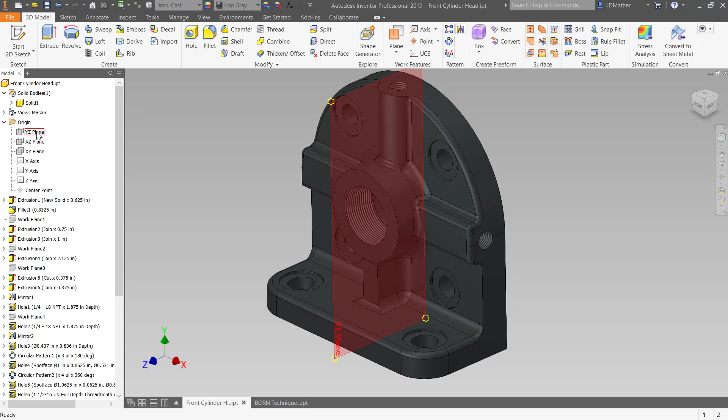In this video, I want to take a look at what's generally referred to as the Born technique, B-O-R-N, which stands for Base Orphan Reference Node. The foundation of the Born technique is to use only the origin planes and the origin center point for your sketches if possible. Sometimes it isn't practical, but as much as you can, use only the origin planes for your sketches. That way, if something changes, your model will be more robust and less likely to fail.

Before I start analyzing this existing part, let's change the color of it to make it a little bit easier to see on the screen. I think turquoise is an easy one to see.

So when I look at this thing, a few things pop out at me right away. I would expect to see a fillet coming across here, and certainly a fillet on this edge to get rid of that sharp corner. In the same way on the other side, I would expect to see a fillet so it looks more like this on the top side. And then I would expect to see a fillet coming along this edge and that edge as well. Those are just things that pop right out to me.

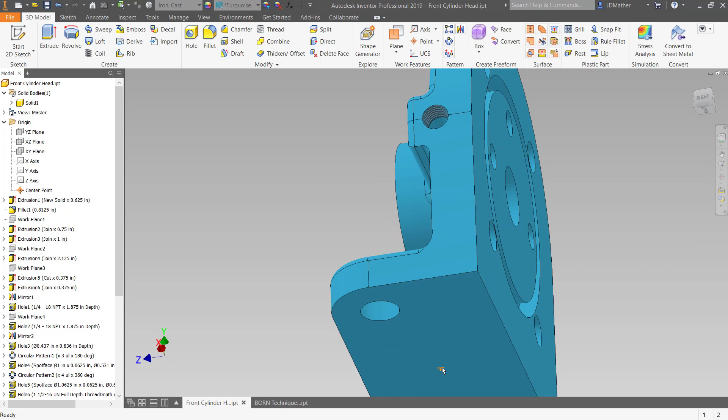When I start analyzing a file, the first thing I like to do is turn on the visibility of the origin center point and see if it was located in a logical location. Now I can't tell—it looks like maybe that was put in the midpoint location of this surface, but I'm not sure if it was or wasn't.

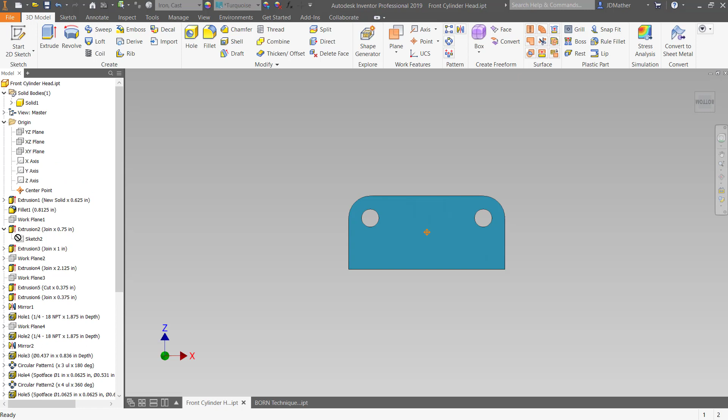That may or may not be. Actually, I'm kind of curious now, so what I'm going to do is drag the end of part marker up. I want to get to before there were any holes in here, and I'm going to tell it to put a point at the center of that loop. So I'll put another point on here and select that. And I see actually it isn't even in the center of this base.

So I would say the location of an origin or datum is really the most important, or first thing, you should consider when modeling a part.

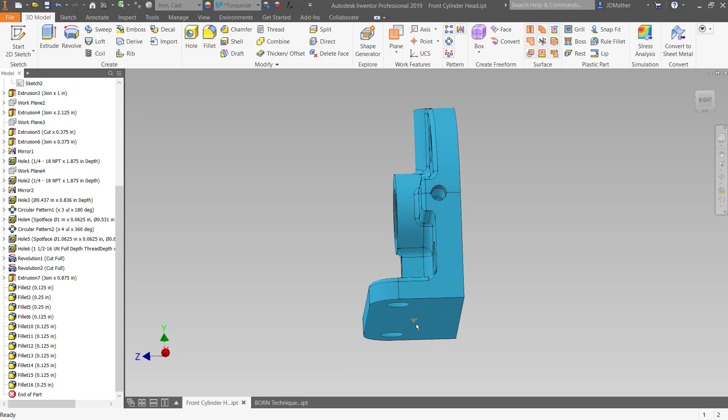Now, I spent 8 years out on the shop floor working on machines, and if you've ever run a Bridgeport milling machine or some milling machine, the first thing you do is you set up a datum. Your table would be one datum, or some parallels or a vice would be the datum you might put on the bottom of this thing. You would have the side of the vice that doesn't move, the set jaw, as another datum, and maybe a stop or something as a third datum. But you set up datums.

Now we can cheat a little bit on that in Inventor, where we put our datum, but we should do some consideration of where we put our datum, and I'm going to come back to that in a minute.

And so I started to examine the features, and I see a work plane here, and I seldom ever create any work planes. I may once in a while create a work plane, but very few work planes.

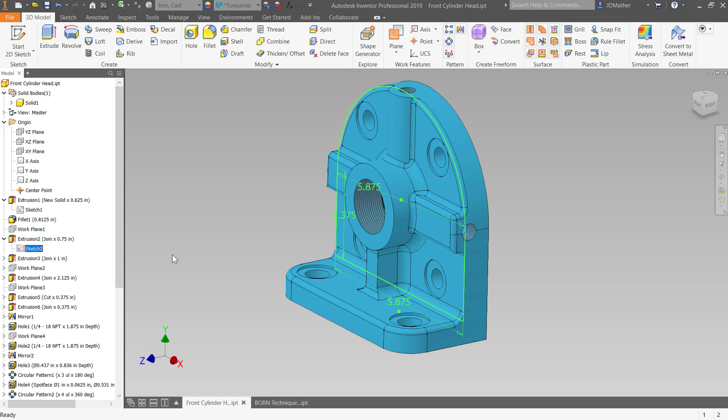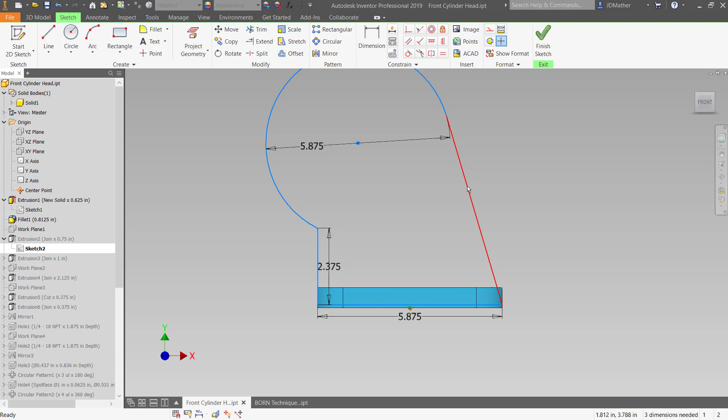Probably not. Anyways, I'm going to edit this sketch because I see there's no push pin or thumbtack on that sketch. I edit it and see down here it says 3 dimensions needed, and by the color of it and the fact there's no push pin, I can tell this is not fully defined. In fact, if I start grabbing geometry, I see it's missing a tangent there, it's missing a vertical constraint here, and it's not connected down here.

So think of this as back when I started out on the Bridgeport milling machine. The first thing I do is set up 3 datums, and part of the reason is that I can remove the part from the machine, take some measurements, and if I need to make additional cuts, I can put it back into the machine exactly where it was before, and make those cuts with confidence that I'm not going to scrap the part.

This runs along the same lines. If you don't fully define your sketch, somebody could easily come along and drag that, or you could accidentally drag it yourself and cause all kinds of problems with your geometry. So that's just one sketch that isn't fully constrained.

If I'm guessing, if I see one, I see more work planes. So already we have 3 work planes here, and here's another sketch that's not fully defined. If I go down, here's another sketch not fully defined, another work plane. Going down here, another sketch that's not fully defined. Almost every sketch is left underdefined, and that's just really poor modeling practice.

So let's look at how I might model this part. The first thing I have to decide is, and this goes back to when I started out on the drawing board back in the last century, when we go to lay out the views on a sheet of paper, you had to give a little bit of thought to what you were going to do before you even started.

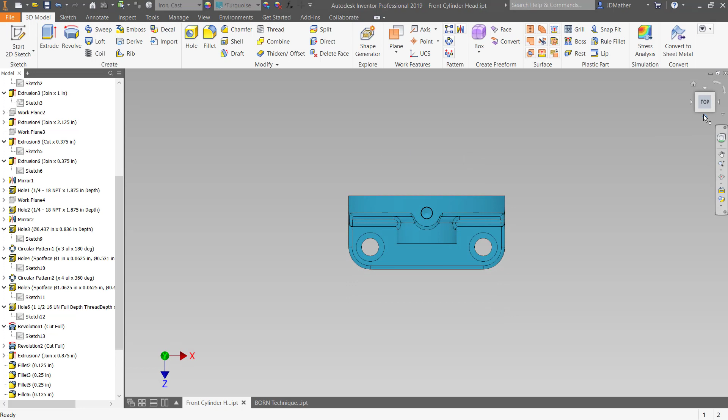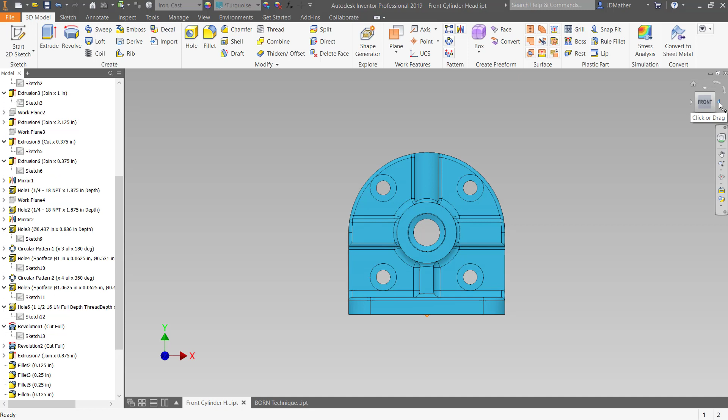The front view is a pretty good view, or this view would be a pretty good view for showing the most detail. And even as I look at this, I start to think about a different way that I might have modeled this than what I'm going to show you. So I've already come up with one way which I'm going to show you, and I'm even thinking maybe I should have changed that and done it from this view. So there isn't just one right way, there's multiple right ways, but I try to find a view that really shows a lot of the details, and I'm going to do it from this view.

Let me restore down this, and I have a new file that I've started, and let's put these side by side here so that we can look at this and see how we're going to do this.

The next thing to do is to look at the geometry and try to break it down into basic bits. One of my basic bits I see is a cylinder here, I see a cylinder here, I see part of a cylinder here. I see a box here, a box here, a box there, the height of the overall box, and then a bunch of cylinders. So I see several boxes and cylinders. Think about that. I can break this down into only several boxes and cylinders.

And if you've ever run a lathe, you know that you can break down a cylinder into a rectangle. In fact, all of these boxes can be broken down to a rectangle. So really everything here could be done with only rectangles. Now I'm probably going to use some other tools other than rectangles, but all of the geometry on this particular part, except for these fillets, could be done with simple 2D rectangles. So I'm thinking about back on the drawing board days, back in the last century.

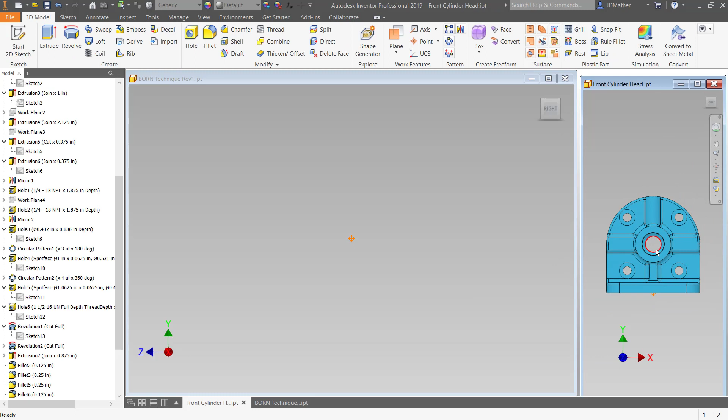Now sometimes I'll cheat in Inventor just because there are efficiencies to be gained from putting the origin in another location. I might put the origin up here in the center of this circle right here, but in this case I'm going to put it in this corner right here.

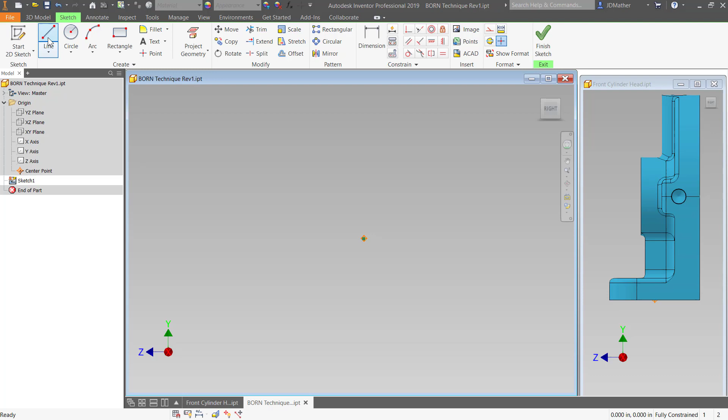Now I recommend when you are modeling in whatever CAD program, that you create one line, or one rectangle, or one circle, one piece of geometry, and dimension it immediately. So I'm going to create a line, and I'm going to go from the origin, over here, and I'm going to dimension this line immediately to give me a sense of scale for the rest of my sketch. That distance is going to be 2 and 11/16.

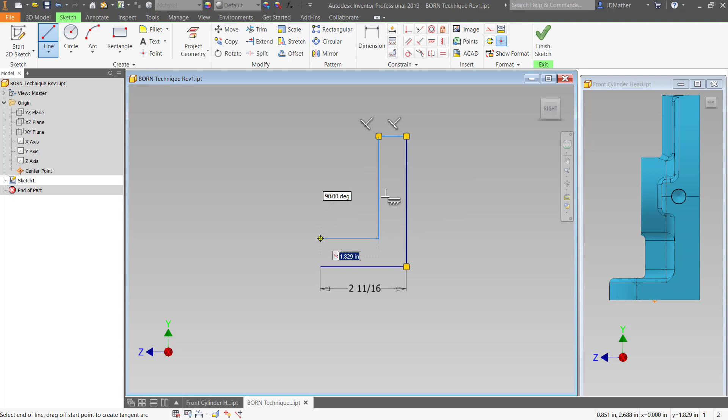I'll put in 2 11/16. Now I'm going to draw the line coming up, over, down, and so forth. I'll go up from this point and come over about like that, then come down about like that, and come over about like that.

Or I could have drawn 2 rectangles. I'm using Inventor 2019 to demonstrate this, but in Inventor 2020 the way it selects profiles has been dramatically improved, the enclosed area here. I might just do it as 2 rectangles in 2020.

But I'll go ahead and put some more dimensions on here. Don't go too far along before you put your dimensions on, you don't want it to get too complicated. So I'm going to dimension from here to here, that's 0.75, and I'm going to dimension this as 0.625.

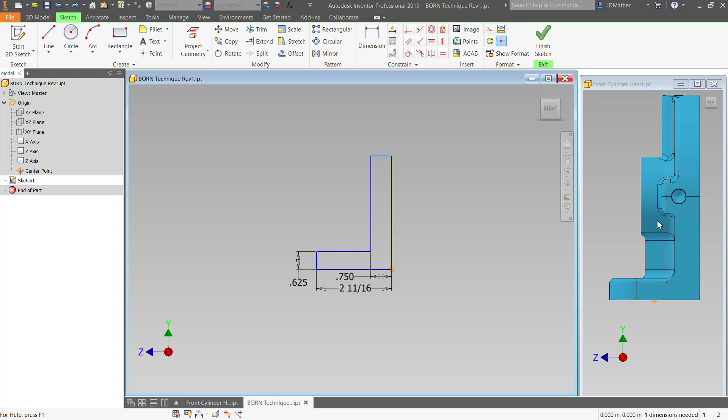I'm going to dimension the distance from here up to here, and actually I don't really know what that distance is, so I'm going to undo that. Remember I said I was thinking about putting a datum, or putting the origin right in the center of this. That's because when we design a part or machine, we dimension to critical locations.

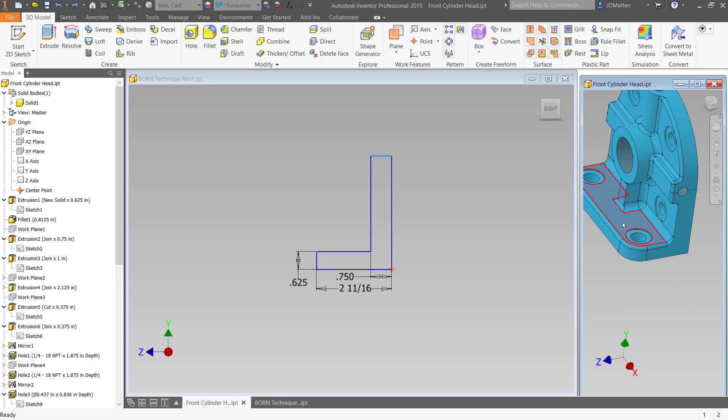The critical location is from the bottom of this part up to the center of this hole. This would probably be a cast surface, rough surface, and this would be a machine surface, cast surface. So put the dimensions to the machine surfaces.

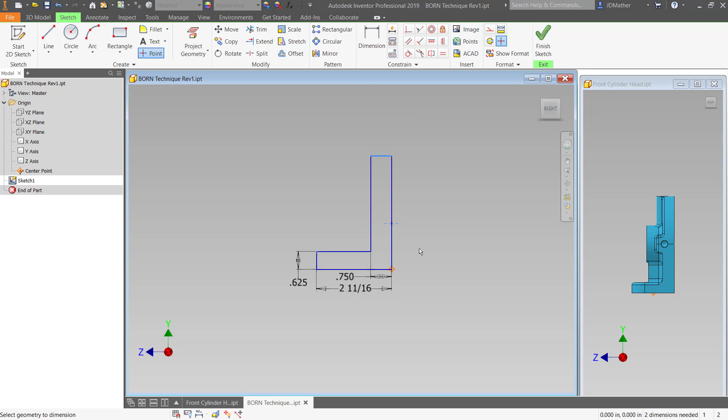I'm going to put a point up here about where that circle is going to be, that cylindrical piece. Be careful you don't click on the midpoint unless that's where it's at. I don't know that it's at that midpoint, so I'm going to click about right here, and dimension from this up to that point, 3 inches, so the center of the cylinder will be at 3 inches.

And then I'm going to dimension from this point up to the top of the part, and that will be 2 15/16.

Alright, so now I have the basic shape of the part. I have it begun, and it might be advisable to just keep the sketches simple and finish this sketch and go on to the next. But I'm going to add a little bit more geometry to this one, so I'm going to do a rectangle.

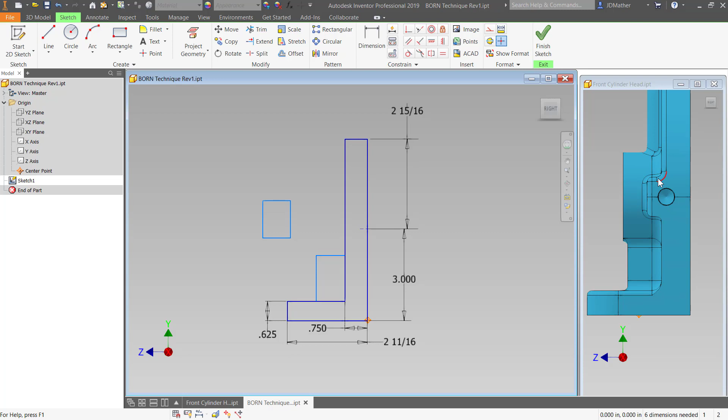We'll see why here in a few minutes. I'm going to do a rectangle about like this, and then put another rectangle out here in space. Here's what I'm looking at: this rib right here. So I have a rib right there and a rib right here, and those are rectangular in shape.

I'm going to draw a line from this point straight over perpendicular, then right click and change this to a construction line. Because that's the center of this cylinder, in order to remind me as I go, I'm going to change that to a construction center line, so that will be the center of this cylinder.

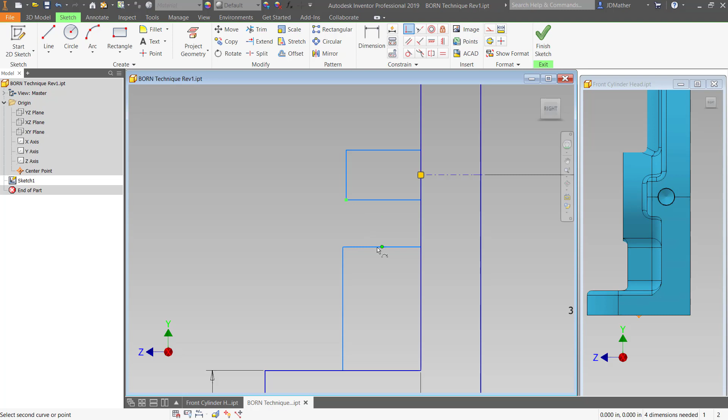Then I'm going to do a coincident constraint between the midpoint of this rectangle and that point, and another coincident constraint between this point and this line — not the midpoint, not the end of it, just somewhere on that line. Then I'll put a couple more dimensions on here.

So I'm going to dimension - remember, this is a datum and this is a datum. I'll dimension from this datum over to this edge, and that's 1.125. And then the distance from here to this datum back here, and that is 1.625.

And then I want to dimension, I have this rib that goes from here to here. I want to dimension the height of that rib as 1 inch. I'll finish the sketch, and I'm going to save this.

Save often. There's no excuse for losing your work. Every time you do something right, save it.

And in order to clear up clutter on the screen, I'm going to turn off the dimension visibility of that first sketch. So this L shape is this shape. This rectangular shape is this rib right here.

And then I'm going to continue on along those lines. So I'm going to start, and this is kind of like being on the drawing board back in the last century, where we laid things out with a pencil on a sheet of paper in 2D. So that's kind of what I'm doing now.

So I'm going to start a new sketch. I'm going to project geometry. This point right here, remember this is that center line, the center of this hole. I'm going to project that point into my new sketch. And then I'm going to draw a rectangle from this point, and I'm going to bring that rectangle up.

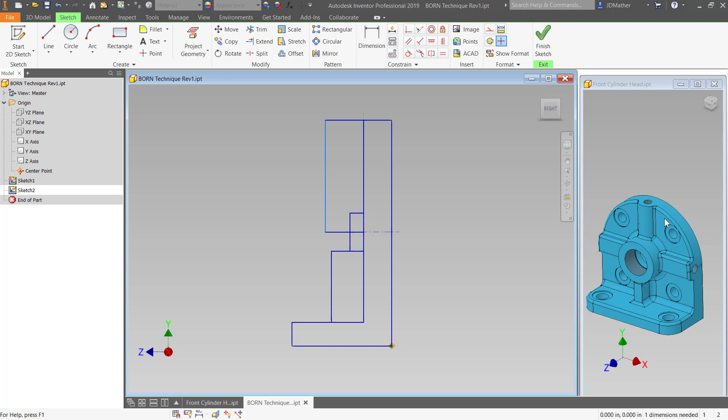Actually, let's bring it up about like this. And I was trying to decide where I want to let go of that. And now I actually want this point to be connected up here at the top, so I need to project that point as well. So I'm going to project this point, and then I'll drag this up and snap to that point. So what I'm doing is I'm doing this cylinder right here.

If we revolve a rectangle, we get a cylinder. So I have a couple of different options the way I could have done this. I could have extruded a circle, or I could revolve a rectangle. So I'm going to revolve a rectangle 0.5 radius for a 1-inch diameter.

So notice everything that I've done so far is simple rectangles. I didn't put the line across here, but I could have done this as a rectangle, that is a rectangle, this is a rectangle, this is a rectangle. And in Inventor 2000, I probably would have done these two as rectangles as well. In fact, even earlier versions, if I had done the rectangle from here to here and then from here up, that would be fewer clicks. 2 clicks for the rectangle, for each rectangle.

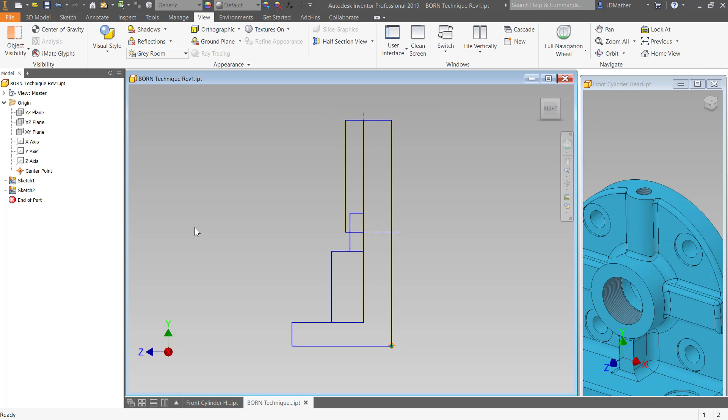Let's see if I want to. I think I'm going to. I could put more geometry on this sketch, but I think I'll just leave just this single rectangle on that sketch, and I will turn off the dimension visibility of that one, and then I will think about what I want to do for my next sketch.

I have this cylinder. I have a hole within that cylinder, and then I have this groove. Appears to be an O-ring groove here in the back of the part. And again, cylinders, a lot of that is all cylindrical that can be done with rectangles.

Okay, so I want to put a cylinder here, a cylindrical feature. So I'm going to start a new sketch, and I'm going to project geometry. I want to project this point just like we did for the other sketches.

And that's one thing is, I'm trying to use as few connections as possible, that if I make a change to say sketch 1 or 2, I don't want sketch 3 to break. So I try to not connect those sketches together too much. Use as few connections as possible.

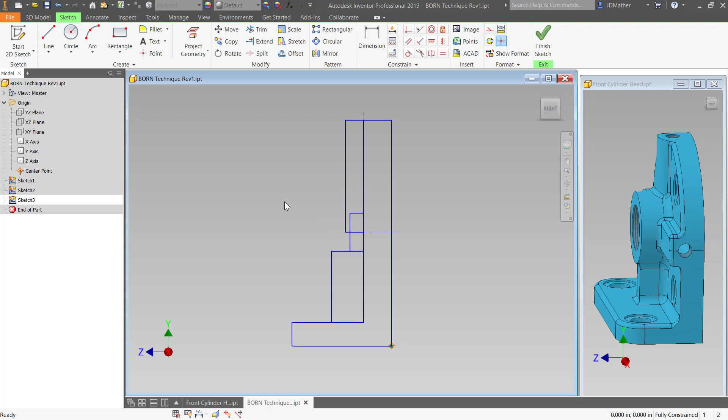And then I'm going to draw a rectangle from this point and up about like that. And I'm going to change this line to a center line, and we'll see why here in a minute. So this is going to be my cylinder, so I want to put a diametral dimension on that, so that's why the center line. So if I dimension to a center line, not the end point, to the center line and then to this point, I get a diametral dimension.

I'm going to do that as 1.375. Okay, and then I want to dimension from this line to the origin. That's my datum, the origin, and that distance is 1.75.

So I'm going to end up revolving this to get my cylinder on the front of this. Then inside that cylinder I have a hole, and so I'm going to do some sketching for the hole.

I'm going to draw a line, come down, not as long as this line, come down about like that, and come over, and I'm going to put an angle on this, and come back. Now I haven't projected this line to my current sketch, which maybe I should do, but I'm going to click here, come up to here, and click over to here.

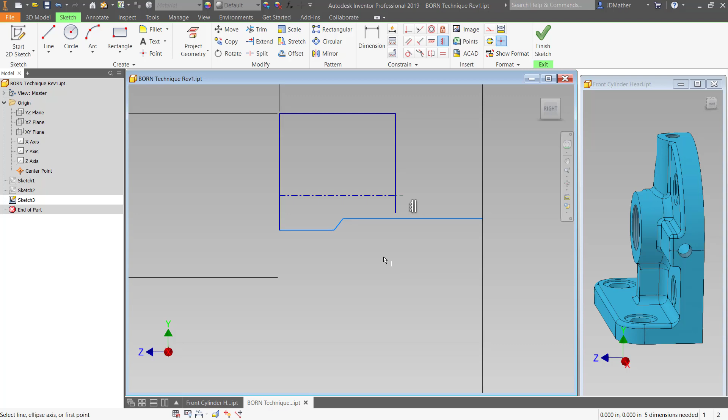And I'm going to put a vertical constraint. Now in 2D, the Y is always vertical, so I'm going to put a vertical constraint on that line, and I'm then going to delete this line.

I put that in the wrong place, and I'm going to come from here back to here, and from there down to here. Okay, so now I have this rectangle as a closed profile.

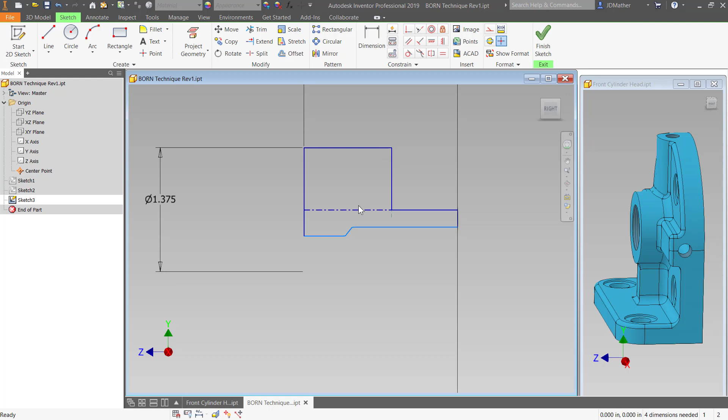That's going to give me my cylinder, and this is going to give me my hole, which goes all the way through to the back of the part, and that's why I put it back here to this datum.

All right, then I'm going to dimension the diameters. So I'll dimension the diameter of the hole. Remember, pick the center line, and then this line. That'll give you a diametral dimension.

And that dimension is actually supposed to be the 1.375, so this is supposed to be 2.25. We'll say that I did this on purpose, right? 2.25, so that I could show you that you can just edit the dimension and change it. Yeah, we'll go with that, if you believe that.

Alright, and then I'll double click on this dimension, and change that to 2.25. Okay, that was supposed to be a joke, so hopefully you laughed or chuckled.

And then I'm going to dimension the diameter from here to here. Again, pick the center line, and I want that diameter to be 1 inch, and I want the distance from here to this point to be 1.25.

Now notice that it changed the angle on this, but I can just drag this back, get it where I wanted it at that angle, and then dimension the angle between here, and I'm going to put that in at 60 degrees for a total included angle when I revolve that hole of 120 degrees.

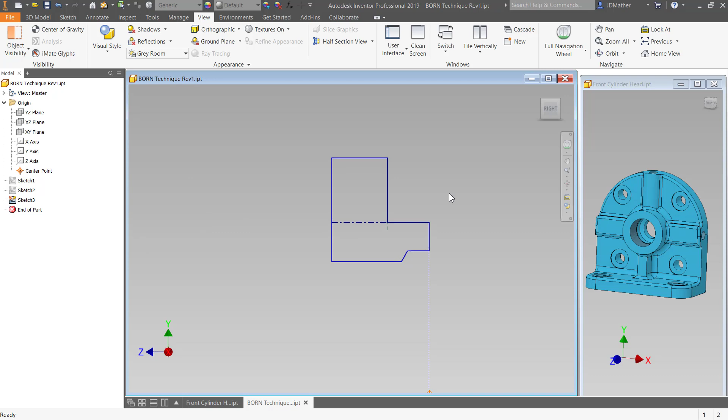Okay, let's think about what we're going to do for the next sketch for the next feature. Look at the back of this part. I have this O-ring groove cut in here.

That can be done with the revolved rectangle, and I think I'll do that. I'll just add that to this same sketch. So let me edit this sketch, and while I'm at it, let's go ahead and change this line to a center line, and then I'm going to draw.

Remember earlier, it's kind of hard to see here, I put this construction line in here, and so I'm going to draw a rectangle somewhere on this construction line, but not at the midpoint, unless that's where it is supposed to be. But I'm going to draw a rectangle about like this.

I'm doing that for this slot back here, and I'm going to dimension it. The inside diameter on that slot is 3.5, the outside diameter of the slot is 4 inches, and then the depth of the slot will be 5 divided by 16 inches.

Make sure you have the IN in. I make sure I put the divisor in there. 5 divided by 16 IN for the units, and it'll show that as a fraction. If I don't put in those units, it will convert it to decimal inches.

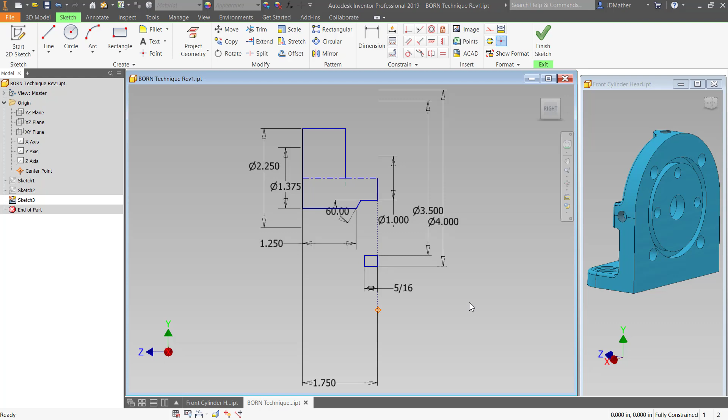Sometimes what I do is I put only geometry that's going to add physical geometry on my sketches, and then on a separate sketch I put the geometry that's going to do the cuts. In this case, I'm kind of mixing. I have an add and a subtract or cut geometry in the same sketch.

Alright, so I've turned off the visibility of that. I'll save the file, and I'll decide what I'm going to do for my next feature.

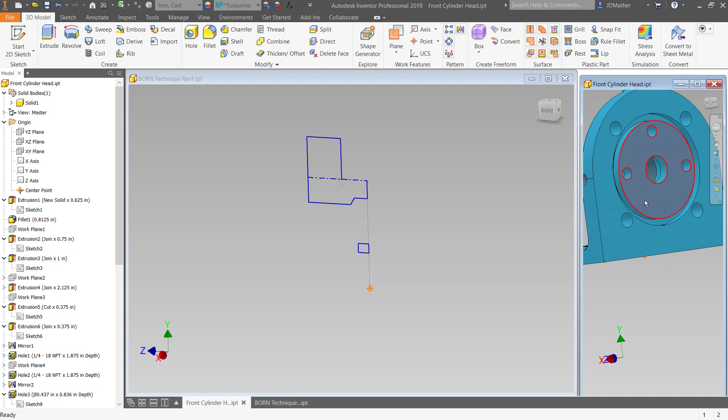I have 3 holes here that are on this back datum. Remember, bottom datum, my back datum, and so I'm going to go ahead and do it. Now there's a lot of different ways I could do those holes. This is just one way.

So if I go to the front view, or if I look at it from the back view, I'm going to draw a circle at the center of that hole. I'm going to go to the appropriate plane, do a new sketch, and then I want to project geometry.

This is the important thing. I want to project geometry. This point, that's the center of the cylinder. I want to project that point to the center of the cylinder.

Now actually I just projected sketch number 3 or whatever. I'm going to undo that. I'm trying to make everything only dependent on sketch 1 if possible.

So if I turn on the visibility of sketch 1 and turn off the visibility of sketch 3, if I project this point, then I only have one place where it could, what I call, go sick. If I've caused some kind of problem, I only have one place to fix it, and that was back in sketch number 1.

So I'm going to draw a circle at that location, and I will go ahead and dimension that circle 2.75. Notice it turns dark, meaning it's all fully constrained.

And then I'm going to draw a vertical line. I might come up here from the 12 o'clock position down to this point, and then over horizontally, and then I'm going to do it again over here on that side.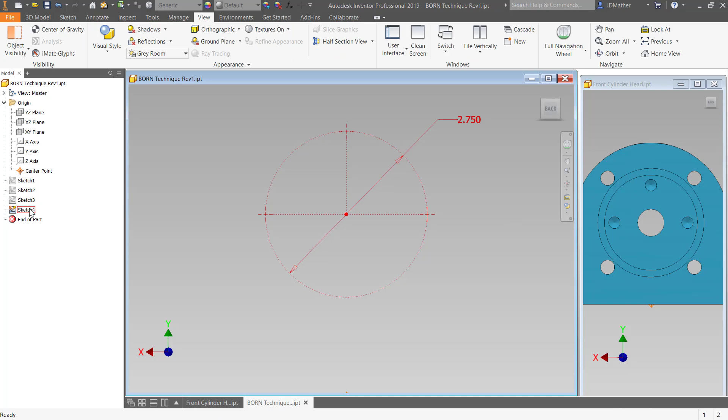I think that's everything that can be done based off of the origin planes. Except for sketch number 4, I did everything off of one origin plane.

If I turn on the visibility of these other sketches, I have this geometry based on that origin plane, and then this geometry based on that origin plane. And in fact, if I go back and turn on the dimensions, I'll turn on all the dimension visibility.

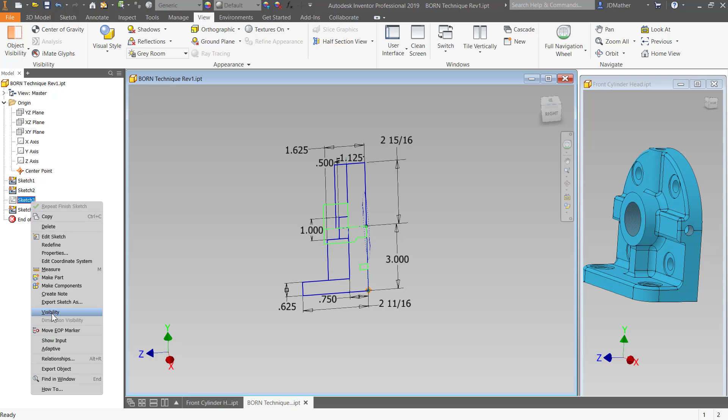Now it's a little bit confusing with all of the dimensions turned on here, but notice I have access to all of my dimensions. So in the real world, you typically have to make changes to your geometry. I can go through here and double click on any of these dimensions and change that dimension as needed to whatever I want to edit.

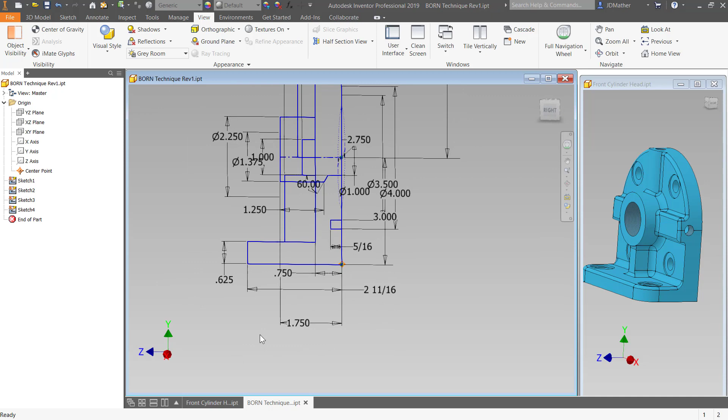And so I have all of my dimensions available here. Okay, so I'm going to start creating some geometry now, because everything else, these two holes are based on this plane, these four holes are based on this plane, there's a hole here, here, and on the other side. Those are all based on other than the origin geometry.

So I'm going to drag my end of part marker up so only sketch number 1 is visible. Now, we could do what I'm going to do next - I'm going to use sketch 1. So I could have done that, and for a beginner, the easy way is then to create sketch 2 and use it, then create sketch 3. But I went ahead and created all my sketches in advance. That's kind of a pro way of doing it, not necessarily a beginner way.

That again, I come from the drawing board, where in fact, let's look at one other thing here which I forgot about. If I go to this view and tell it to show this shaded with hidden edges, or maybe it'd be better to show it as wireframe with hidden edges. And so let's go wireframe with hidden edges.

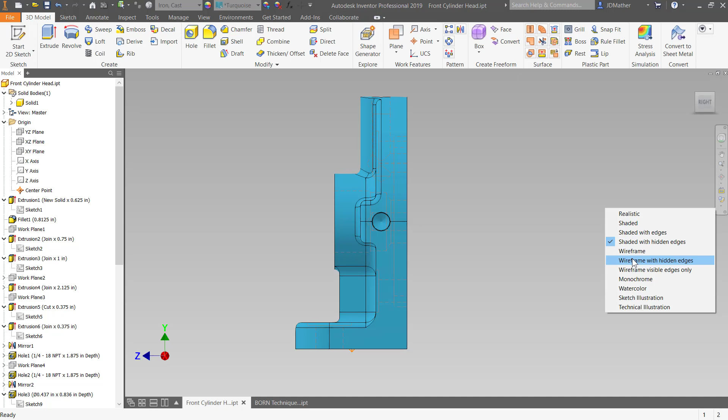Okay, so really what I have done, if we ignore the fillets in here, is on my sketch, I have sketched this rectangle, this L shape, this rectangle for this. So that's really what I did, is a 2D drawing board drawing to lay out my sketches.

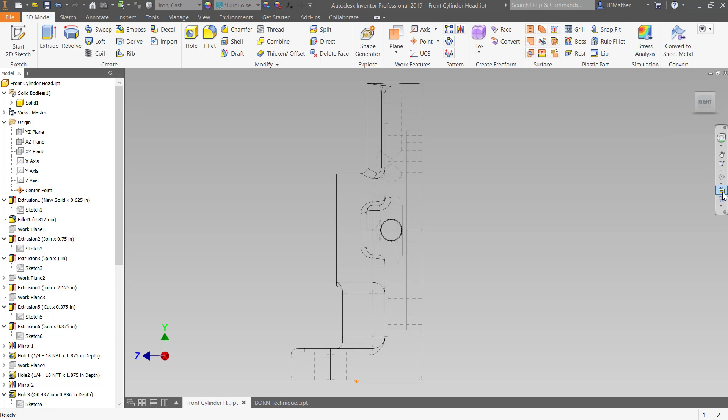Alright, so we'll go back where we were. And let me drag this back up so only sketch number 1 is visible. And I'm going to start creating solid geometry. So, again, you could have only had just this sketch or created only this sketch. I'll do an extrusion, and I'm going to do an extrusion of this distance times 2.

And I want to go symmetrical about the origin. So that's one thing we might do differently in the CAD program, is use that symmetry about the origin, which on the milling machine, I'd put a datum on one side or the other. And so I'll go ahead and say OK to that.

And I want to reuse that sketch, so I'll turn the visibility of that sketch back on. And then I want to extrude this rib. And I want it to go the same distance, or what I could do is tell it to go between this face and this face. So if I change the distance of extrusion 1, this one will always follow it. So that might be a better way of doing that extrusion.

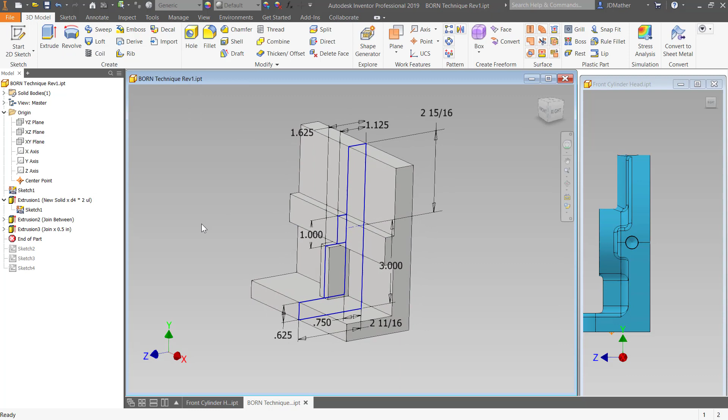I'm going to extrude this rectangle, and I'm going to go mid-plane on that, and I'll do that as a distance of 0.5. Okay, and then I'm going to turn off the visibility of sketch number 1. Notice it has a hand symbol on here - that means that sketch is shared by multiple features. So actually that sketch is shared by three features right now.

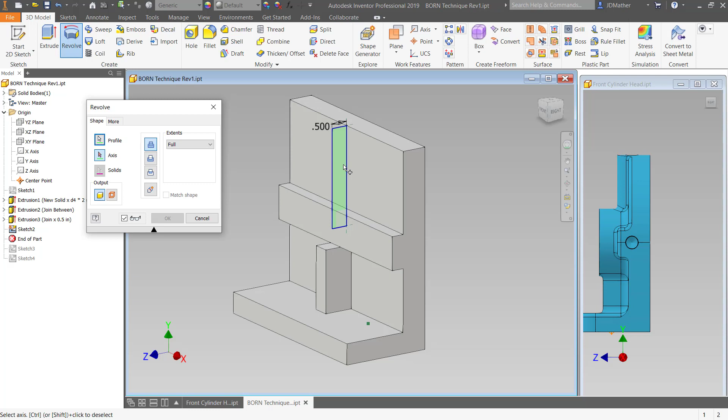Now what I want to do is make this cylinder. So I'm going to drag the end of part marker down, and that reveals this sketch. I really intended to make this a center line - it doesn't really matter, but let's go ahead and do a revolve. The reason I do that as a center line is so that it reminds me that that's going to be a revolve feature. I can still pick that as the axis of revolution, and I'll say OK to that to join that.

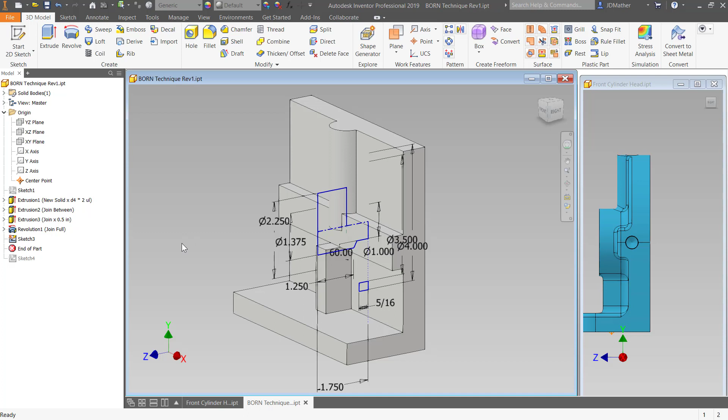And I'll drag my end of part marker down to the next sketch. And again, this was the cylinder that's going to go around, and so I'll do a revolve, and I'll pick this area, and revolve around the axis. Now when I did that, I had two areas that were selected in that revolve, let's look.

So I need to get only one side of that axis. And so I'm going to go back to profile, and control-unselect this, and I want to get only the upper portion of this. Now in the new version of Inventor 2020, it's really easy to get just the portion of that profile that you want. And in earlier versions, though, it can be difficult to select either this area or this area.

I'm having a lot of trouble trying to get just this area up here. That might be a good reason to do this as multiple sketches rather than one sketch. Let me see if I can find a way. I'll show you a trick, hopefully it will work with this.

I'm going to edit this sketch and put a sketch point at this location right here, and I think there's already one here, but I'm going to put one there as well. I'm hoping that will help me select just this area by putting those sketch points in there. The other thing I want to do is make sure I have this as one line, and this as a different line for a boundary. So I'm trying to make sure I have a boundary of just that area.

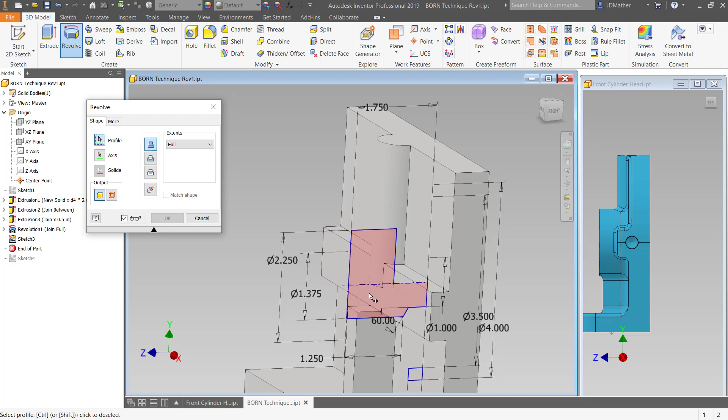Alright, I'll try to do this revolve again, and again it's giving me trouble picking. I can pick this area no problem, but I'm having trouble picking just this area up here.

Let me show you a second little trick. So that putting the point there... whoa, I had it there for a second. I keep getting it, and there, I got it.

I was going to show you a second little trick, but I'm not going to do it, I'll just explain it. A second little trick, though, is I could have changed any one of these boundary edges to a construction line, did my revolve, because now it only has one closed boundary, and then changed it back from construction line to an object line. But I didn't have to do it, so I'll just leave it the way it is.

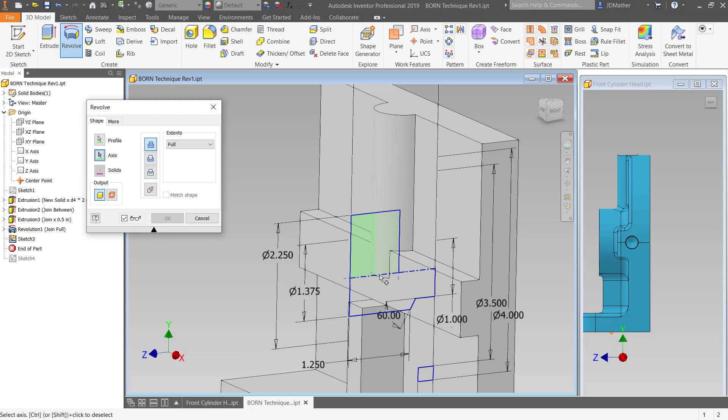So I'm going to do that revolve as a cylinder. Now we might be tempted to go ahead and put the hole in the part now, but what I prefer to do is model this in a similar way to the way I would manufacture it out on the shop floor. So I get all of my solid geometry first, and then I go back and cut away, making the cuts that I would make out on the shop floor. That's what I'm going to do in this case.

So I'm ready to put some fillets on this. Now putting fillets on a part can be maddening. Sometimes until you get a lot of experience, you just have to be willing to try different techniques - maybe I shouldn't say techniques so much as different orders of putting the fillets in.

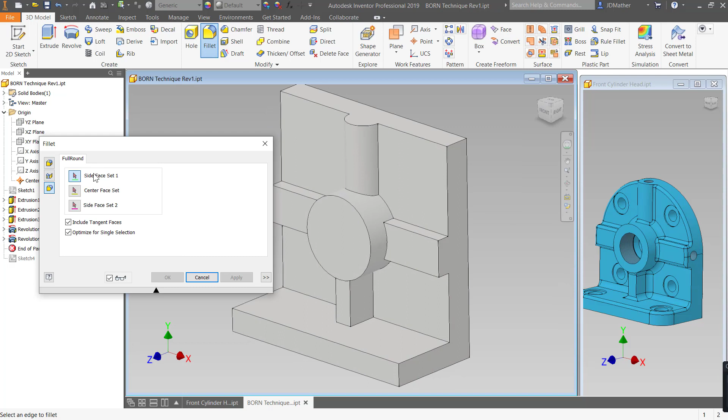Now there's one that's real obvious, and that is this large fillet that goes across there. Right now this has a planar top on it, so I'm going to do a fillet, and rather than put in a radius, I'll tell it to do a full round fillet. It asks me for a side face - this is the first side. Then it asks me for a center face, and then it asks me to select a second side. By doing that, no matter what I change the width of this part to, that fillet will always update to go all the way across there and give me the correct fillet.

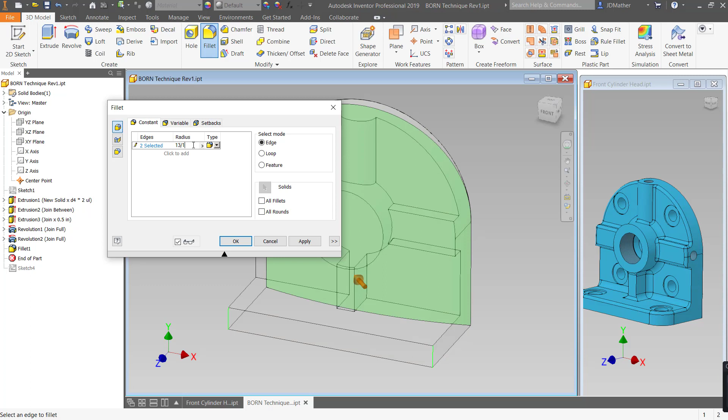Alright, then I want to fillet this corner and this corner down here. So I'll select one of those corners, select the fillet command, come over and also select this edge, and I'm going to make that fillet 13/16, so I'll do 13 divided by 16 inches. And I've put in that fillet.

Then I have to start making some decisions about the order in which to put the remaining fillets, and that's really based on a lot of experience. So I'm going to go through and put the fillets in, some 0.25 fillets that go in here. Let's do those larger fillets first, so I'll do a fillet of 0.25.

Actually, there was what I call the edit pencil up here - I clicked on the edit pencil when I changed that dimension to get it back to the selection cursor. Hopefully I'll remember to show that again on a future fillet. So I want to fillet around this edge, 0.25.

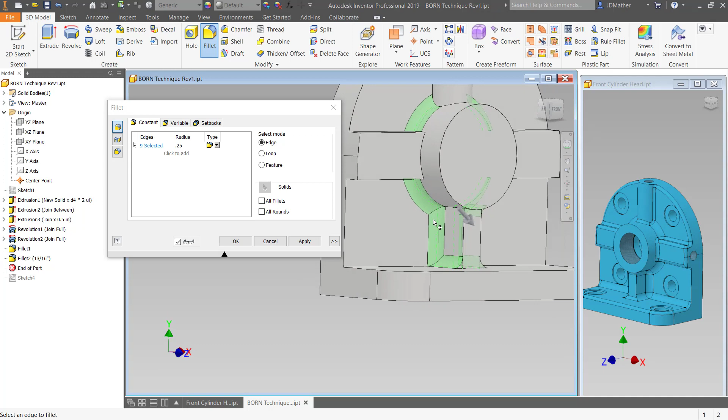Then I want to do the fillet along this edge, and along this edge, and this edge, and this edge, this edge, and this edge. Okay, so those are all 0.25.

I'll say OK to that, or I could say apply. Let's go ahead and just say apply, and then I want to change my next fillet. So notice that selection.

Change to edit pencil. I'm going to do 0.125, and then to get my selection tool back, I'll click here on the edit pencil. Now I can go through and select geometry. Based on prior experience, I want a fillet to kind of go all the way around here.

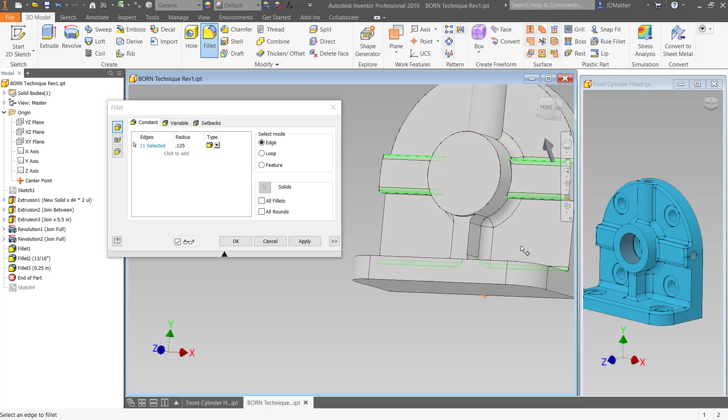So before I do that, I'm going to select this edge. I'll select this edge, this edge, this one, and this one. Also this one, this one, this one, and this one. Okay, so I have those fillets in, so that's going to allow that fillet to go all the way around that edge.

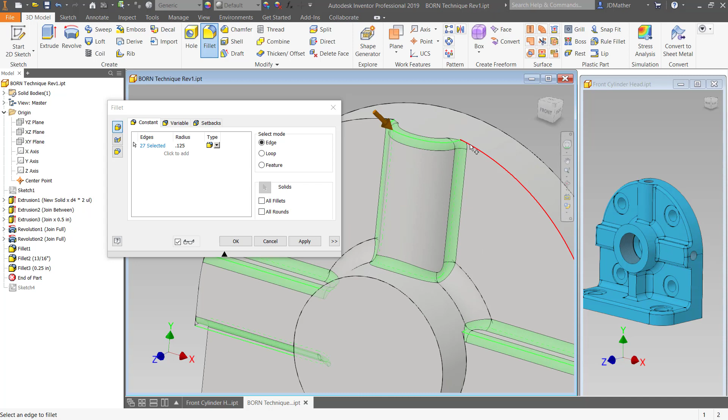And then I'm going to select this edge, and I'll select that edge, so the fillet will come along here. It'll go around this edge, and I'm going to go ahead and finish this rib that's kind of isolated by itself, so I'll select this edge, this edge, this edge, and this edge right here.

Alright, so I like how that's looking. Now I didn't pick this edge, I didn't pick this one, I didn't pick this edge. I'm going to go ahead and say OK, and so those all solved OK.

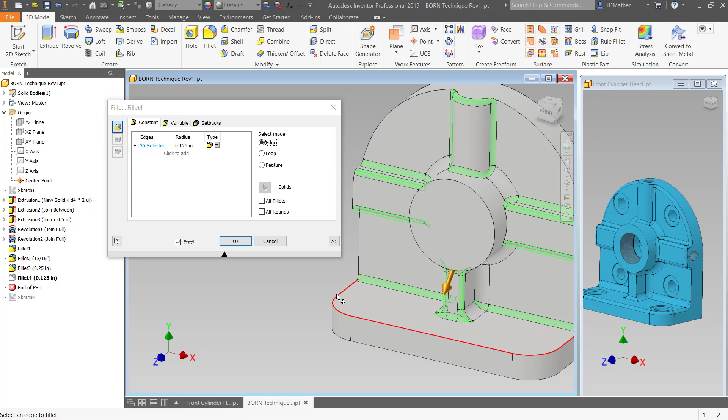I may try to add a fillet along this edge, so I'll go back and edit that feature. I'm going to put it on loop, and actually it's trying to go around that loop. I don't want it, so I'll put it back on the edge, and if I go around here, notice I'm having to pick each one of those edges, so I'm going to cancel out of that.

If I add it as another fillet feature, there's fewer picks, so now I only need to pick it one time, and it goes all the way around with just one pick. Then I need a fillet in here, and I need a fillet in here. I'll say OK to that. So it's just a little trick to reduce the number - I didn't have to go around and pick each one of these edges if I separate those fillets.

I think we have all the solid geometry. We're ready to start cutting the part.

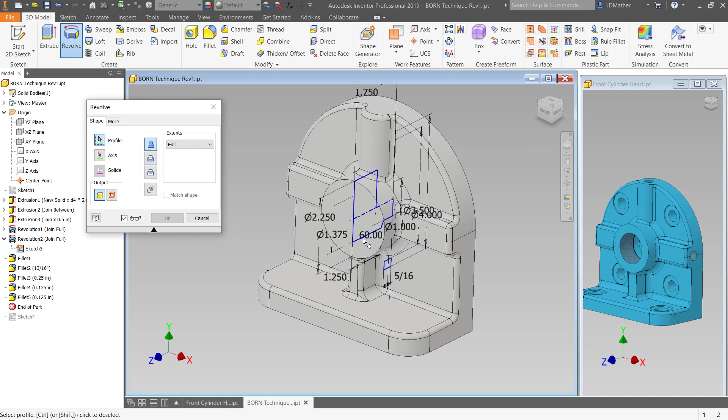Remember back earlier on sketch 3, I had the geometry for the hole. If I turn on the visibility of that sketch and do a revolve, I want just the bottom portion of this. Remember before I had a hard time getting the top, now I'm having a hard time getting only the bottom area. Again, the new version, Inventor 2020, is much improved.

And so I got it, and I'm going to do a revolve, and tell it to do a cut, and so I put the cut. Let's turn off the visibility of the sketch.

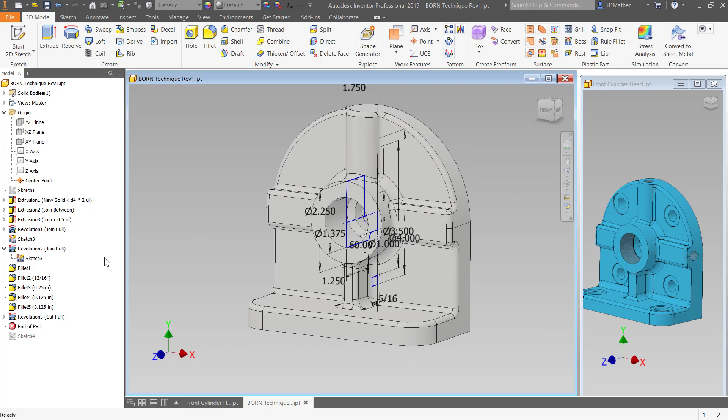Now there's a second hole in here, a tapped hole, and I will go ahead and put in that tapped hole. So I'm going to do a hole feature, and select this face, the cylindrical reference. It moves it to the center, and I'll put this on threaded instead of tapped hole. The size I want is 1.5, 16 UN, Unified National.

And then for the depth of this, I don't want it to go through all, so I'm going to click here for distance, and tell it full depth, and then the depth of this hole I'm going to do as 0.875.

Okay, now I like to put a break on the sharp edge here too, so I'm going to put a chamfer on here. So let's do countersink, and I could do the chamfer after the fact. I'm going to do countersink 1.5. I'll put that on there now.

Okay, so I broke that sharp edge to help the fastener go in here, and then the thread. But I'm just going to go ahead and do the sketch on this face.

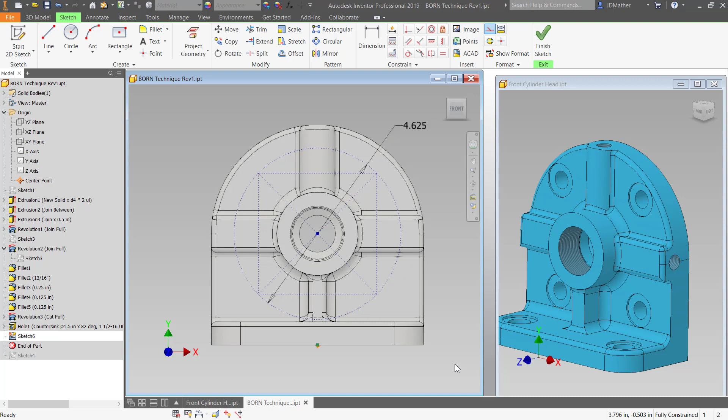Now I'll use that trick from earlier. I'll change that to construction geometry, although we don't really need to. Then I'll select this area and click here to put those 4 points in, but it also gets a point I don't want, so I'll select that and click here again. You could click on point 1, 2, 3, 4 - I'm not sure which is more clicks, I just prefer to do it this way.

I'll finish that sketch, and then do a hole again. Inventor automatically picks up those 4 center points. I want a spot face hole, with the diameter of my spot face at 1 inch.

The depth is 0.0625, and for the drill diameter I got the dimensions wrong. I'll go ahead and put this in as 17 divided by 32 inches.

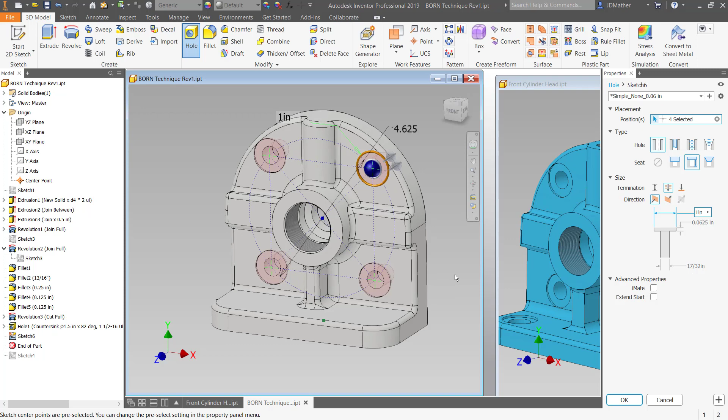Now notice it's red - it's saying I can't have both of those conditions the same. This one was supposed to be 1 inch. Now it turns black, so I have that as 1 inch. These holes are at 17/32 with a depth of a 16th, and I'll say okay.

I'm going to go ahead and say okay to this. I realized I made a mistake earlier when I did this - this fillet right here is larger on this one, so I need to go back and edit some of those fillets.

I'm going to drag down the part marker. This was the first fillet, then I put in that fillet, and then I did this fillet, and I needed to add that line and that line. So I'll edit that feature and select this line and this line.

Now when I pull this down one more step, it's going to give me an error because that edge and that edge are now gone. So I'll drag that down - actually it didn't give me an error, I was expecting it to. If it had, I would have gone and edited this one first, held the control key down to unselect that edge, and then brought it down. Okay, so I have that fillet, and now I can bring that down.

The next step is something we have to be really careful of, and actually I've got an error in this sketch now. Let me edit that sketch - it's showing me an error for a circle, probably because of this face, since changing the fillet changed that face. I was actually surprised it didn't return an error earlier, so I'm going to undo back to before I changed that fillet.

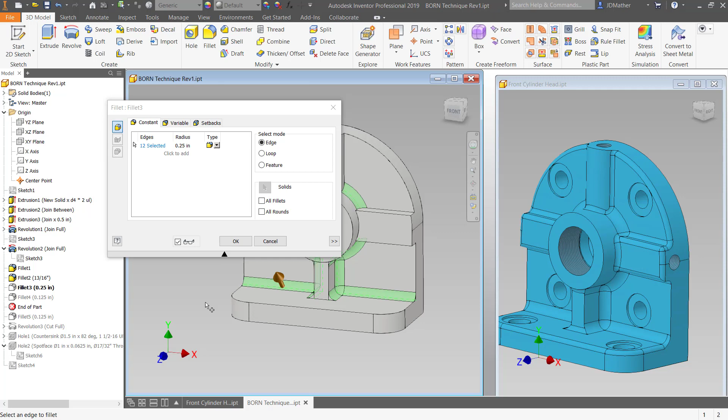So these are the kind of things that happen that you've got to watch out for. I'm going to edit this fillet and control-unselect this edge and this edge. I'll go back up to this fillet and add those 2 edges to it. Then we'll drag this back down and hope that it takes care of that problem with that sketch 6.

In this case, it's still showing that sketch as having an error, so let's try this. I'll right click and redefine that sketch, clicking this face again - I could pick any of these 4 faces. I'll pick this face again, and that took care of the problem. So by having those fillets in there, when I put them in the wrong order, it lost the reference to that face, and I had to redefine it.

That's the kind of thing that happens when you are not using the Born technique. These 4 holes were not based on the origin planes, and I ran into a problem with the sketch not being robust, because I had to abandon the Born technique for that particular sketch.

Now we got to be real careful when we do this. When I zoom in here, notice there's a little flat going across here, and another going across here, and there could have been up here too, although I think there's a tangent. It might be a slight flat there and there, because we did this hole from this face, but actually it comes around and it's bigger than that spot face, on the fillet.

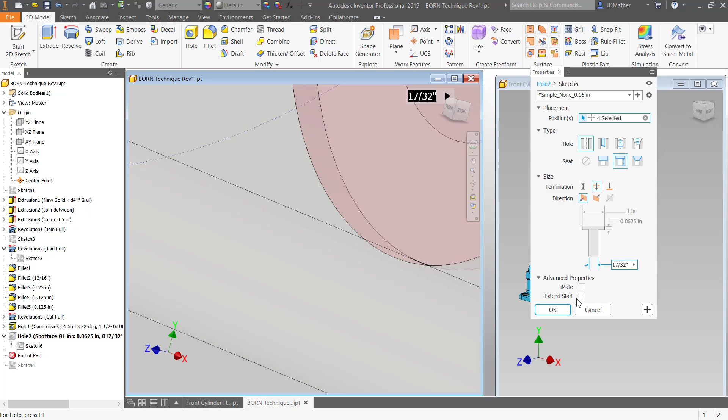So what we need to do is go to that feature, and we'll say edit feature. I'll edit that feature, and I'm going to do this. Let's zoom in here where we can see one of those holes. Okay, so watching that little place right there, I'll do the extend start, and I'll say okay. Now notice that it cut that out. So watch when you have a hole like this that intersects a fillet that adds material to the part, that you get that cut away.

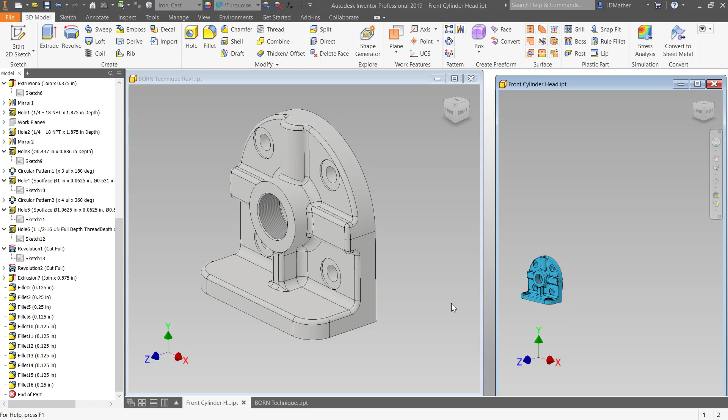Alright, now I have some holes that go around here on the back side of this. So I'm going to cut the O-ring groove first. So I'm going to drag the end of part marker down. And actually, so there's for the holes. Let's go ahead and put those holes in now. I think we'll cut the O-ring groove last. So I'll go ahead and I will do those holes.

And so I want those to be drilled holes. I'm going to uncheck these conditions, and I want that to be a drilled hole, and it's got the 3 points selected. The diameters of those holes are 7/16, and for the depth of those holes, I don't want them to go through all, so I'll put in a depth, 0.836. I'm not sure where that number came from, but I'm following along from the existing part, and so I'm using this part as my reference. Now notice the hole is going the wrong direction, so I need to flip that hole to the other direction. So here under direction, I'll flip that so that it's going in that direction. I'll say OK to that, and so I have those 3 holes.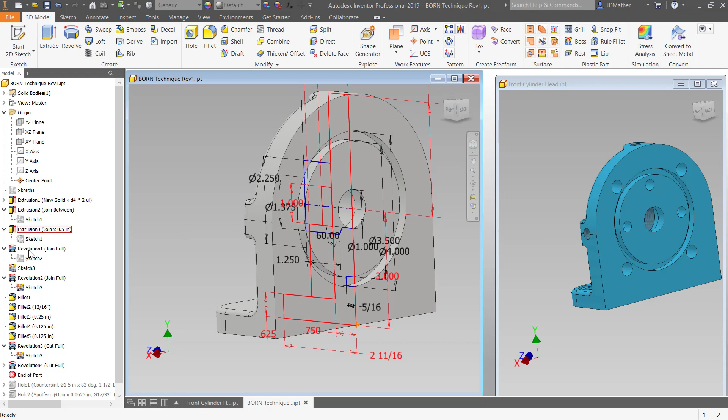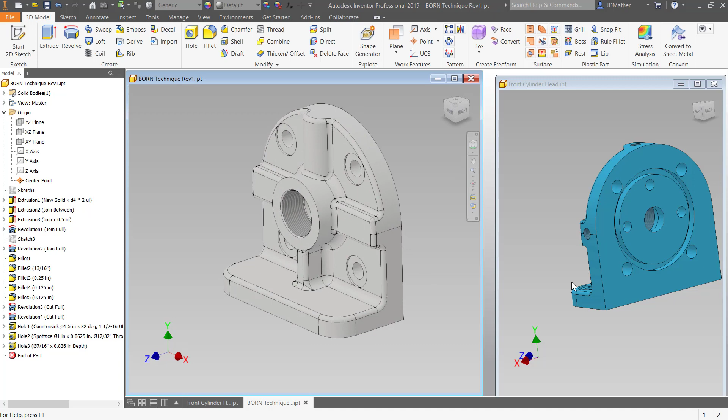If we can go back down to where we were, I'll drag the end up. So I can change history by just dragging the end of part marker up or down and put features in the location where I want them, in the order that I want them. And I think I'll do these 2 holes, and then I'll do the 3 holes on the outside last. So these 2 holes are going to be on this face. So that isn't exactly the Born technique when we use a part face, but in this case it makes sense to do it.

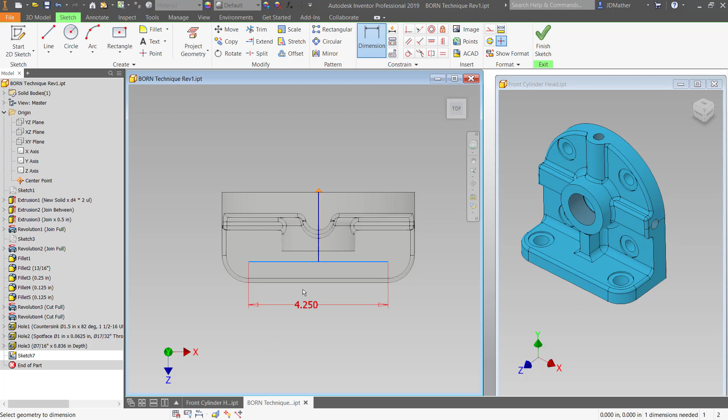So I'm going to draw a line to keep those 2 holes centered up this way, and I'll draw a line down here horizontally, and I'll put a coincident constraint between the midpoint of this line and the end of that line, and then I will put my dimensions on here, and let's just go ahead and drag this back here, and I'll put my dimensions on. This width, the distance between centers of those holes, 4.25, and then the distance from here back to the origin.

I want to get that. I'm trying to get that origin point rather than the edge of the part. Actually, I can get this point, and that distance then 1.875. Okay, and again, I like to change those to construction, but it's really not necessary. But I'll right-click, change that to construction, and I'll put a sketch point here and a sketch point there. I will finish sketch. I'll do my hole feature. And maybe I should have done the counterbores, you know, back to back, or the spot face. I'll do a spot face. The spot face on this one is 1.0625.

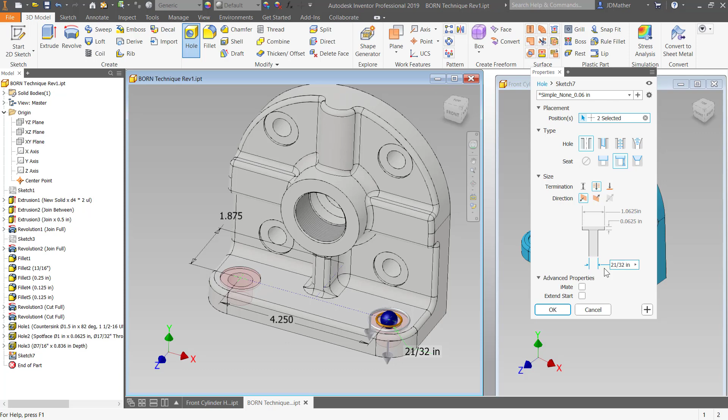1.0625, the depth 0.0625, and the drill diameter 21 divided by 32, and I'll say OK to that. And so I have those two.

Now I didn't make sure that I had that going through all, so let's make sure. I will edit feature and make sure that's set to go through all.

One of the things you might have noticed is that over here in my browser, it's given me a list of the distances that I gave, and that isn't the default for Inventor. Let me show you how I turn that on.

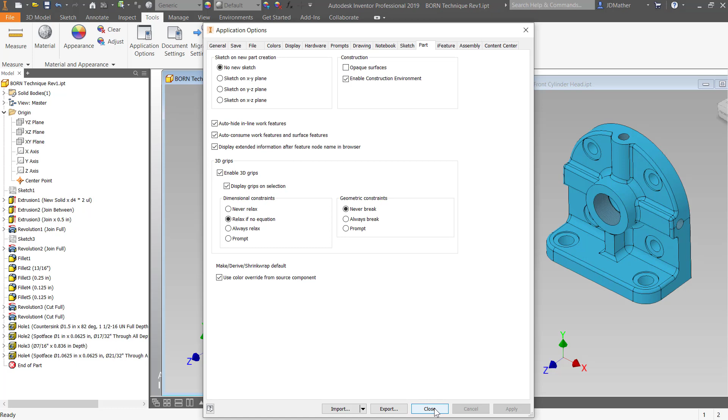If I go to Tools, Application Options, and on the Part tab, I've set Display Extended Information after Feature Node in the browser. So as I create a feature, it gives me this extended information that I find really useful. If you ever take the Inventor Certified Professional exam, one of the first things you should do before you even start is turn on that extended information. It will help you answer the questions a lot faster on the exam.

Okay, so now I need to put a hole here, here, and over here. So I'm going to put one hole over here and then do a circular pattern of that hole.

So I'm going to do a sketch on this face, and then I'm going to draw some lines to locate that hole, and so I'm going to draw a line that goes up and over. One thing that I've done also is back in the application options is I turned off auto project.

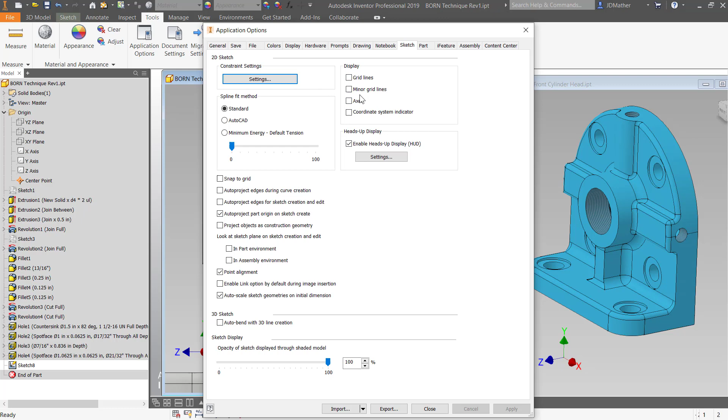I guess I better show that as well. On the sketch tab, there's some auto project tools that I turn off. I only project exactly what I want to project, but I do want the origin to always be projected, so I'll project the part origin, and then I like to show this sketch display all the way up to here. I also turn off these axes and grid lines, and so those are just preferences that I have.

And so now I'm going to put some dimensions on here, and so let's go back to the sketch tab, and I'll put some dimensions on here, from here over to this line.

And now I actually want to make sure that I get that line and not the edge of the part. So sometimes what I'll do is I'll turn off the visibility of the part temporarily to make sure that I don't get the edge of the part when I'm putting that dimension in, because I want it to be as robust as possible if I make any changes.

Actually, while I'm doing that, let's go ahead and put in this height as well, and I can just accept whatever it is now. But one thing is, if you just accept a dimension like that, make sure that you go back and edit it.

I see a lot of times that somebody will forget to do that. I thought about it, and I really don't want this—this hole is lined up with the center of this, so I'm not going to put in that dimension. I'll put in this dimension, 0.625, and I've already put in that height in sketch number 1.

So let's go back, turn on the visibility of sketch 1, and I'll project geometry—this point that was, controls all this cylindrical stuff. I'll select that point, and then now everything is controlled from that sketch number 1.

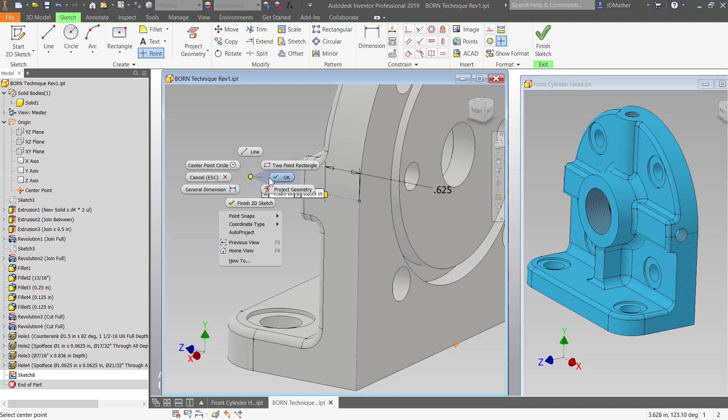There's the point. I'll drag this up, drop it on there. It all turns dark. I like to change that to construction, and then I'm going to put a point on here. Actually, this one, remember, I don't want that as a center point, or it'll try to put a hole there. I just want it as a sketch point, and then I'll put a center point on this one. Okay, I will then do the hole feature.

So I'll go to do a hole, and I want this one to be the tapered tapped hole. I don't want it to go through all, so I'll put in here for distance. I want this to be an NPT, National Pipe Thread, and I'm going to do that as a 1/4 18, 1/4 18, and for the depth of this, I want it to be 1.875.

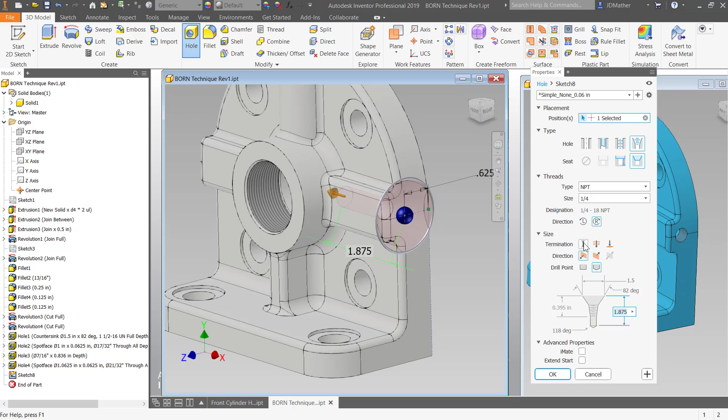Inventor will choose an appropriate depth for the pipe tap. You could override that if needed, but in general you should accept the default. I also like to break the sharp edge, so I'm going to do a countersink on this. Now, that pipe tap 1/4 is not 1/4 of an inch - it's a nominal specification. I'll guess 0.5, and you can just look at it visually to see if that looks appropriate. That looks pretty good to me. I'll say okay to that, so I broke that sharp edge.

Then I'll do a circular pattern. I'll select this feature - I want to pattern it about this hole, so I'll pick the cylinder out here. About that cylinder, I want 3 copies in 180 degrees, and it's previewing going around this way. I want to go the opposite direction, so I'll flip that rotation so it previews here and over here.

Now, one thing you have to be careful of - in some cases you may need to expand this and select 'adjust' rather than 'identical,' or it might not come out right. In fact, I think it's not going to come out right here. Let's accept it now so you can see this. I'll say okay. Well, it did come out okay in this instance, but to be safe, if you click 'adjust' you're less likely to have it come out incorrectly, because it's going to try to cut the same material over on this side, but this one is the opposite side, and we're revolving around in this direction.

I think that completes everything on our part.

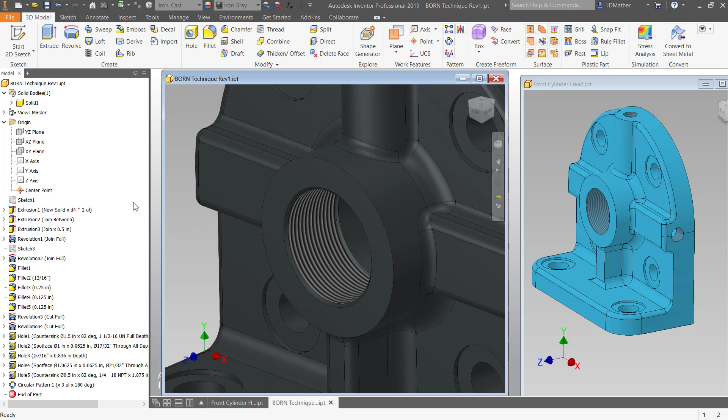Maybe I want these machine surfaces to show up better, or more like a machine surface. So if I go to the properties of that, I could select any one of the machine surfaces, but I'm going to make it look chrome, because remember, this isn't material now, this is appearance. I'm going to make it look like polished chrome. Now that's kind of dark, it's hard to see, but it looks more like it's machined.

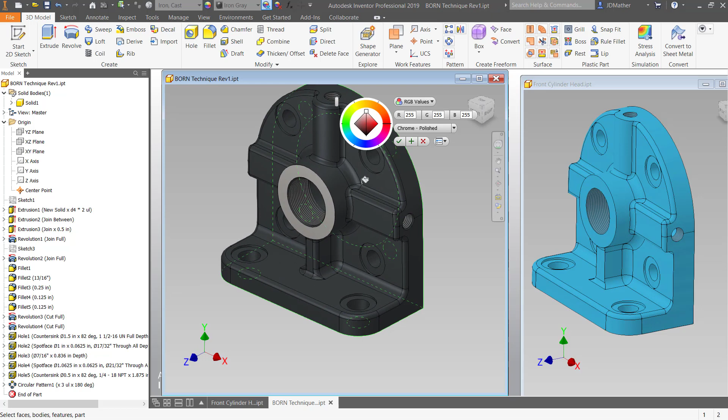You can do that by face or by feature. So for the holes we could change, or come up here and click to adjust. I get this eyedropper, I can pick up that color with the eyedropper, and now I get a paint bucket. I could drop it on this face down here, hold down the control key, select that face, and go around and get all the machine faces to give them a lighter color to make it look aesthetically pleasing.

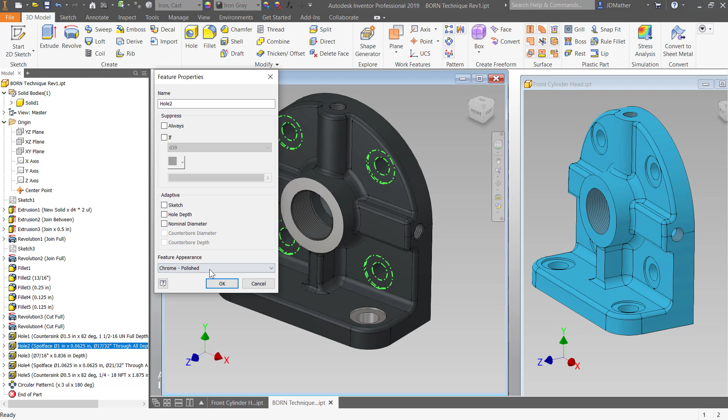Let's do at least one of the holes here. By doing it by feature, I'll go to properties of the feature and set that to chrome polished. I like the way that looks, so I'll do the next one. I'll go to properties and do that chrome polished. This was a revolve I did earlier, so I'll go to the properties of that revolve and change it to chrome polished. Oops, wrong one - that was the outside revolve, I don't want that. I need to find the cut revolve, so I'll go to the properties of that and change that one to chrome polished.

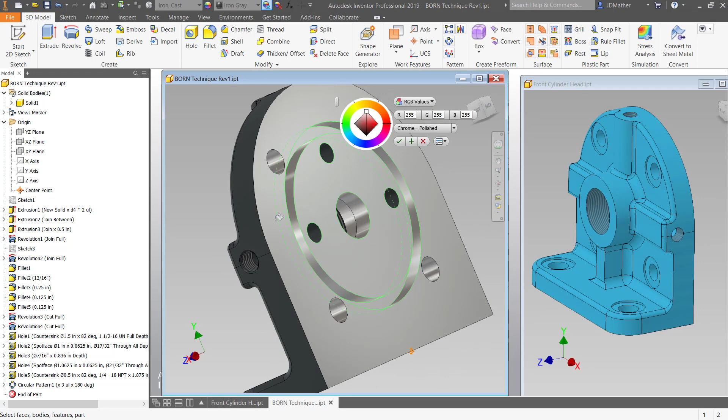Alright, so that gets that back in there. I should have gotten this face - I need to get those holes. Let's get this one, it's so easy to do. I'll get that one - you could do this as a feature, or just do 3 picks to click that. So I've got those. That's all the aesthetics of making it look pleasing once we've completed our part.

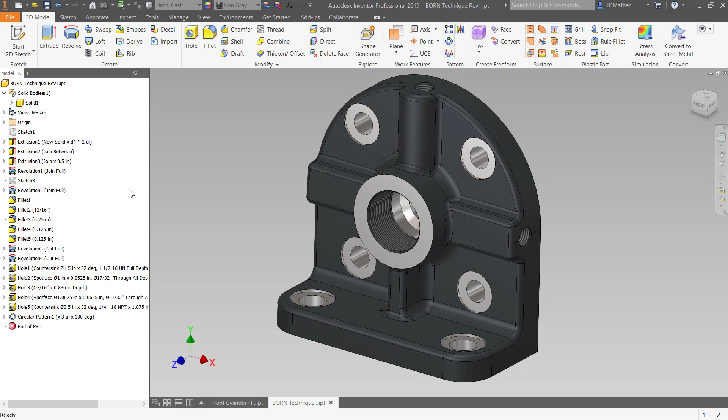And then if we need to make any changes, we've done it in a technique that is really robust. We're less likely to cause anything to break, and if we do break anything, it's relatively easy to fix.